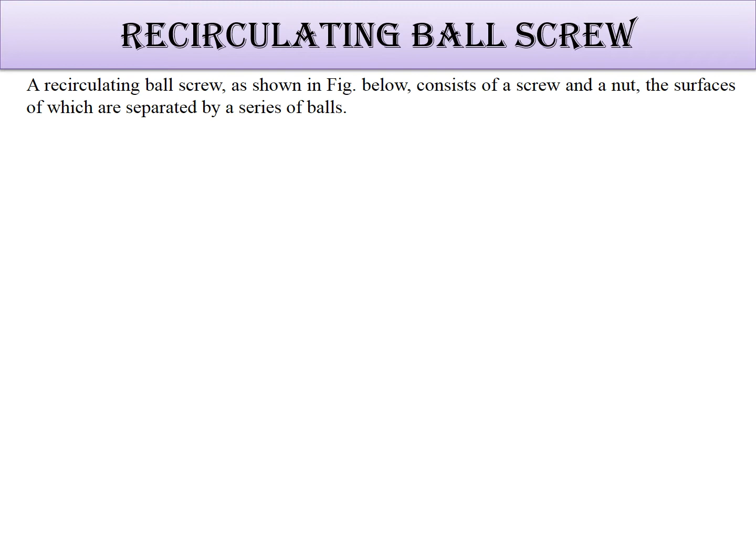The next and the last topic of power screw is what? Recirculating ball screw. Now, recirculating ball screw means what? It consists of a nut and a screw, and the surfaces of which are separated by a series of balls. So, these are the balls which are inserted here. A nut is an assembly where small balls are there, and these balls are restricted to move in this nut only. They are not going to go outside this nut, and this helps in many ways.

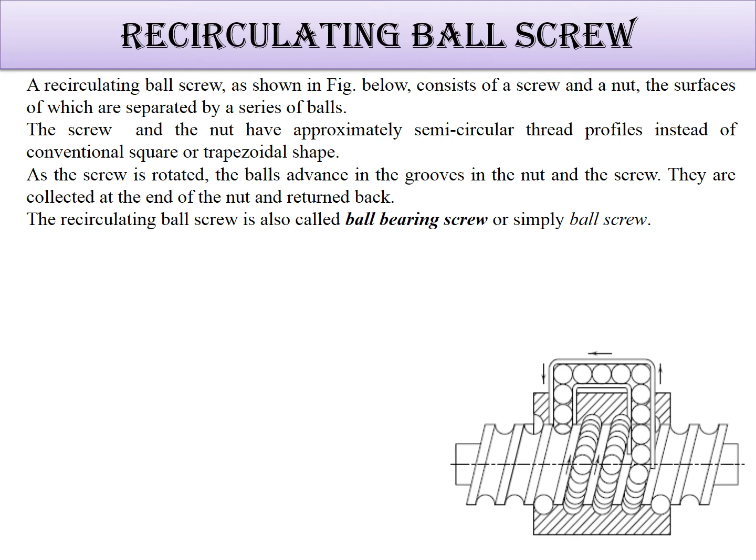Let's see. So, an approximately semicircular threaded profile instead of conventional square or trapezoidal threads is used here. So, as the screw is rotated, the balls advance in the grooves in the nut and the screw, and they are collected at the end of the nut and returned back. It is also known as a ball bearing screw or ball screw.

And such screws are preloaded and give accurate motion due to elimination of backlash. So, no backlash is provided here. So, recirculating ball screw can be used for high speed of up to 10 meters per minute. So, you can imagine 10 meters per minute is a good speed. So, it is made of nickel chromium steel.

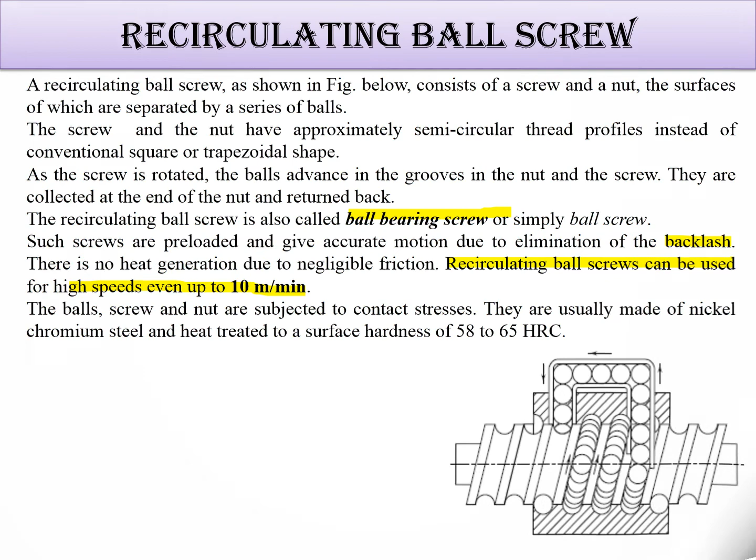Now, if you compare it with the conventional power screw, recirculating ball screw offers the following advantages. In conventional power screw, there is sliding friction between the screw and the nut. In recirculating ball screw, there is rolling friction. This is the friction change, in the grooves of the screw and nut. This reduces friction, so the efficiency of conventional power screw is as low as 40%, whereas the efficiency of ball screw is 90%. You can imagine, if you change sliding friction to rolling friction, what type of efficiency you can get.

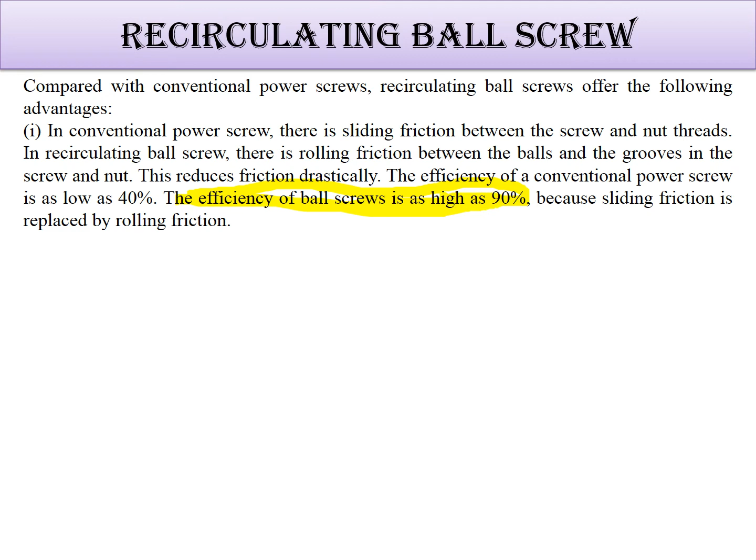Now, in conventional power screw, stick slip phenomena can occur due to the difference between the values of coefficient of static friction and coefficient of sliding friction, which can damage the nut and even the threaded part in conventional power screw, but in recirculating ball screw these things are eliminated.

So, a conventional power screw must be adjusted periodically to compensate for wear on the surface of the screw and nut, while recirculating ball screw is virtually wear free. Okay. So, the load carrying capacity of recirculating ball screw is more than that of conventional power screw. So, that is why recirculating ball screw is good as compared to the conventional power screw.

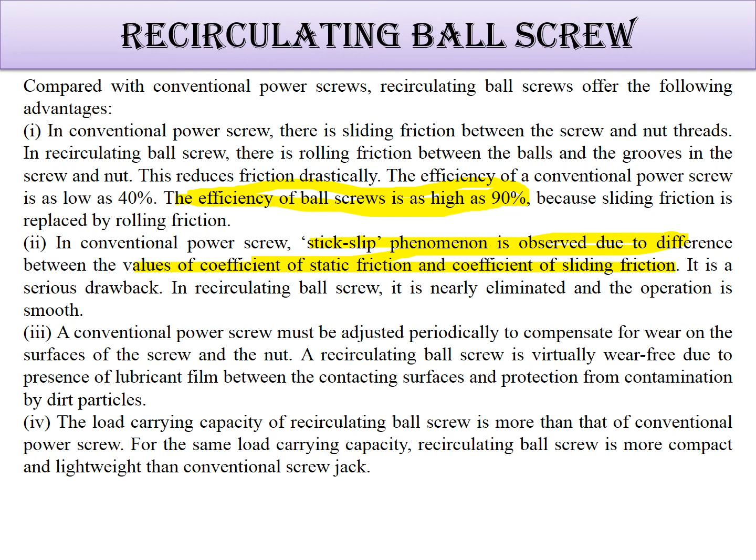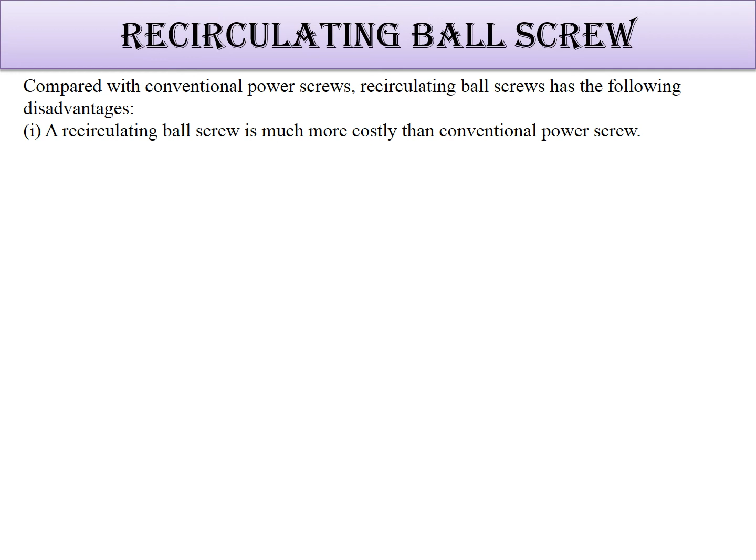Now, compared with the conventional power screw, recirculating ball screws have the following disadvantages also. A recirculating ball screw is much more costly than the conventional one. You can understand this part because it has a greater manufacturing cost. So, recirculating ball screws are usually overhauling due to low friction. That's why a separate brake is required to hold the load. And buckling of the screw and critical speed are serious problems with recirculating ball screw.

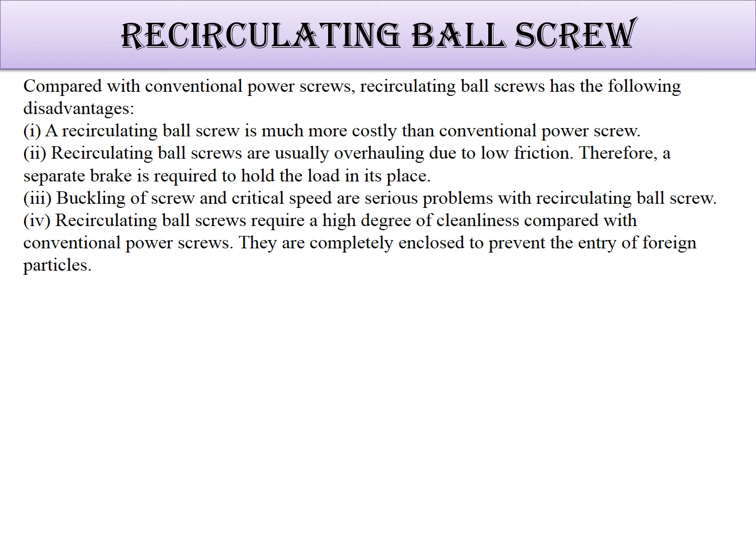Recirculating ball screws require a high degree of cleanliness compared to the conventional. Recirculating ball screws require a thin film of lubricant between the ball and grooves, and conventional power screw can be easily lubricated by grease.

So, recirculating ball screws are used in the following applications: in automobile steering gears, in power actuators, in XY recorders of CNC machines, aircraft landing gear retractors, and you can find so many more. So, these are the things which we have discussed here. So, I hope you understand the power screws. So, from next we are going to start welding. Okay, hospital beds, machine tools.